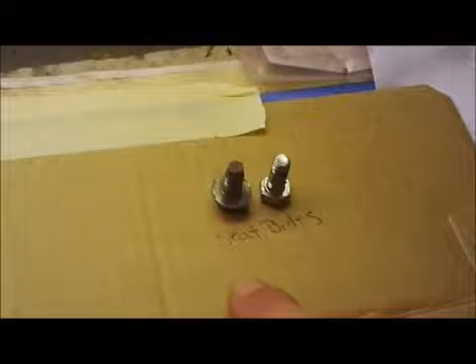Here's a tip of the trade. Whenever possible, when you're working on something that you've never worked on before and you're unfamiliar with its parts, bolt lengths, where things go, whatnot, I like to lay out a complete workbench with something, this time I chose cardboard, where I can label stuff. Just set the bolts here like that, parts, whatever, and right next to it, seat bolts. And then set everything up really nice, neat, and organized, and then you know where everything goes when you go back together.

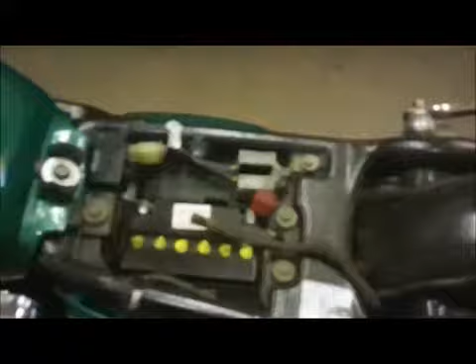But here, I want to show you guys, if someone's ever doing this, I noticed there aren't very many videos on YouTube of people doing the heads on this type of bike, 650 Custom. There's a bolt on each side of the seat, here and here, yep, right there, and you take those two bolts out, and the seat slides right up out and comes off, and unveils your battery and your regulators and whatnot, and more importantly, it reveals the tank bolt. So I'm going to zip out that tank bolt and I'll show you guys that.

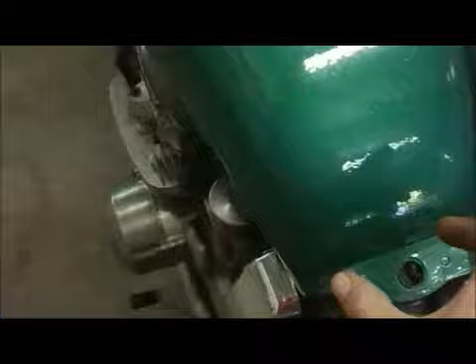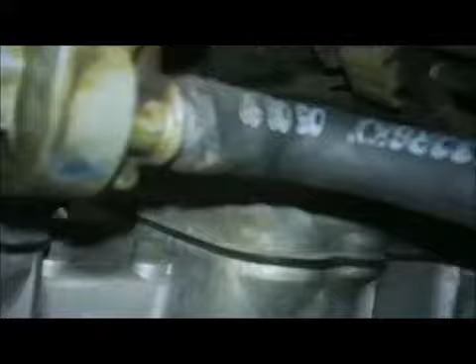Okay, so to remove this tank, you want to remove the tank bolt, and then the tank just slides in. It has two rubber grommets. It slides in on the frame, and then that one bolt is what holds it on. But you want to remove that tank bolt so the tank can move. And then you guys can't see, let me give you some light. You want to remove the fuel line coming off of your cock valve, and then you can remove the tank.

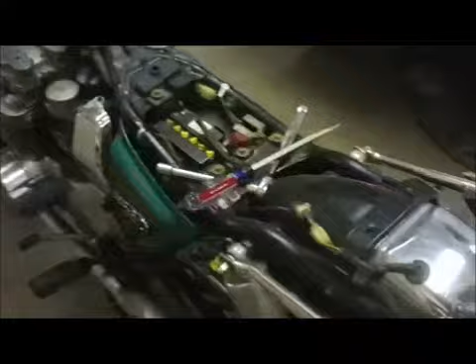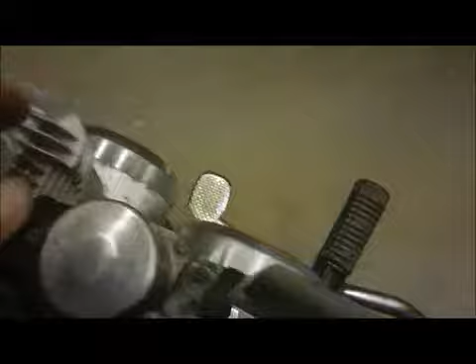Okay guys, I got the tank off, I got the seat off. I removed my fuel line completely from where it goes into the carburetor right here. I just took it off, get it out of my way. Next thing I'm going to be doing is I'm going to take off these airbox side covers to open up and give me some room. This one and this one, they're held on with Phillips.

Hopefully they come out. And then whoever did the carbs, where it goes from the airbox to the carbs, they just put heavy duty zip ties on it to hold it on. So I'm going to remove these zip ties here, try to push the airbox out of my way. These little rubber collars that hold in the carburetor to the airbox can actually be pushed in. They're rubber, as you can see here. See that? So you can actually push them into the airbox and give you a little bit more space to wrestle with this carburetor.

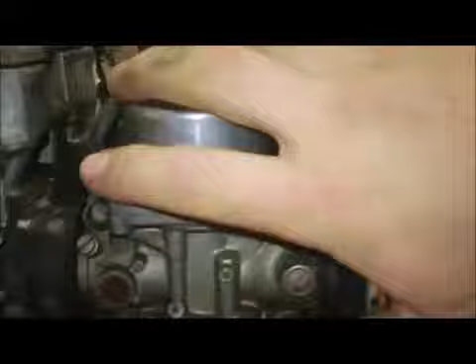Then I'm going to loosen these clamps and all these boots that hold in the four carbs, and I'm going to rock it up and down and try to pull it back as far as I can out of my way. I may remove these cables, these throttle cables and choke cable, and pull the carbs completely off of the bike to give myself ample room to work on the cylinder head. But if I can push these carbs back far enough to fuck with it, I might just leave the carbs where they are to save a little bit of time, but I haven't decided yet. But let me get started removing these and those and seeing what we can do here.

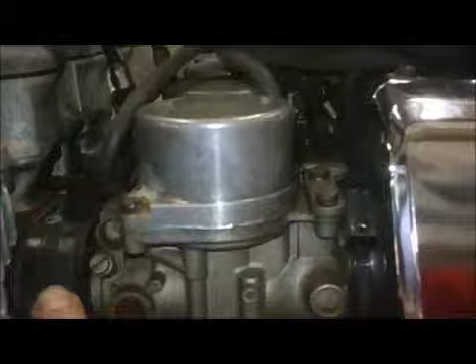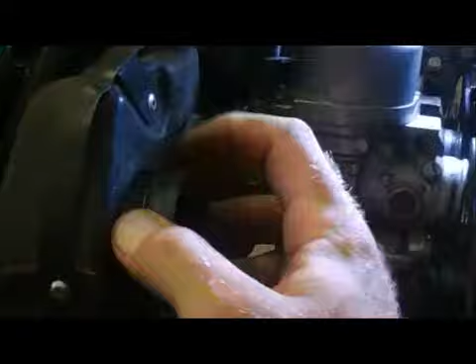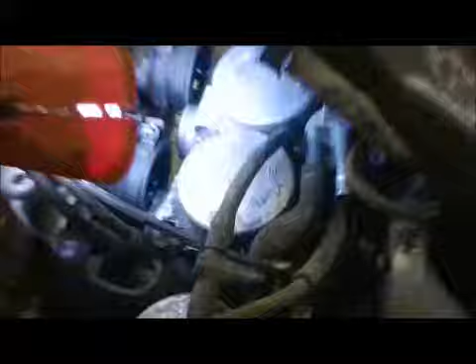Okay guys, these little intake boots here, they do just kind of slide right back in. You gotta pull that lip down and push them in. That gives you a lot more room to get the carburetor out. Gives you about a ½ inch here. Loosen up all those clamps. You want to rotate the carbs downward and they pop right out. Then you're gonna have a hose here that goes to the airbox that you're gonna want to remove.

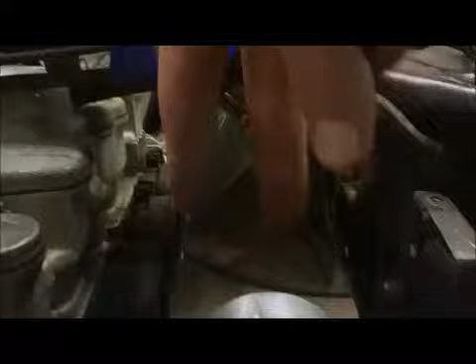Oh, my eye itches. And you're gonna have another little hose right there on top of the carb, this guy, that has to get removed, as well as these cables have to be removed, which I'm going to do right now. I'm going to yank the carbs out. Okay, so the carbs are out. I marked the one cable, this one, because there's two cables in the front. I marked which one was the rear cable so I can tell the difference, and then I'll automatically know which one was the choke cable.

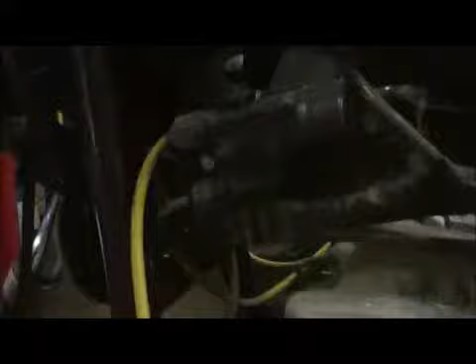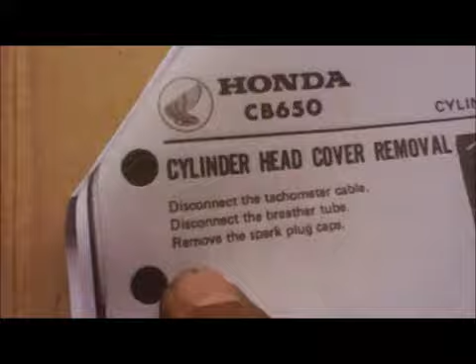That's not hard. I'm going to be removing my spark plug wires next, so I'm going to mark them. I don't know the exact firing order, but I'm just going to mark them 1, 2, 3, 4 straight across, and I will personally know exactly where they went. And then I have to remove this right here, which I believe is the tach. Yep, tachometer cable. And then I disconnect the breather tube and then remove the spark plug caps, and then remove the spark plugs, and then remove the covers.

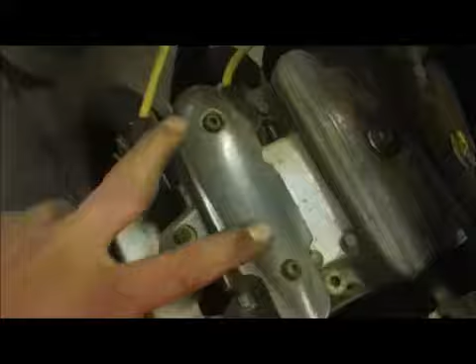So that means I'm going to be removing the tachometer cable, this breather hose, these spark plug boots, and then I'm going to be removing the spark plugs, and then I'm going to be taking out this cover, and this cover. Alright, so we got some Allen heads going on there, and we got some 10 millimeters going on there, and we'll zip that off and see what we got. Over here I got the carburetors.

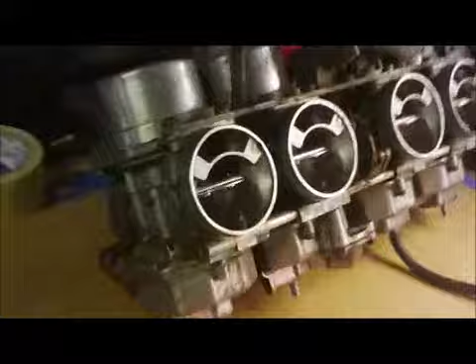They look pretty clean inside there, but that ain't shit because I can't see inside the float bowl. But like I said, this bike ran really fucking good, and I am not taking these carbs apart because I know they run good. I'll wait until the carbs start acting up and then I'll fuck with them.

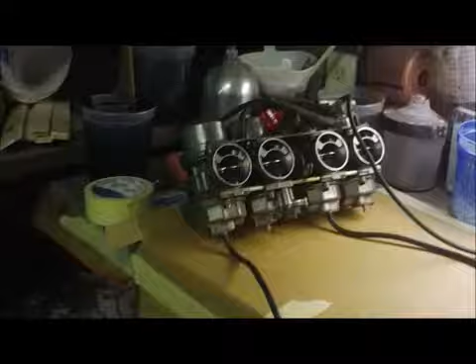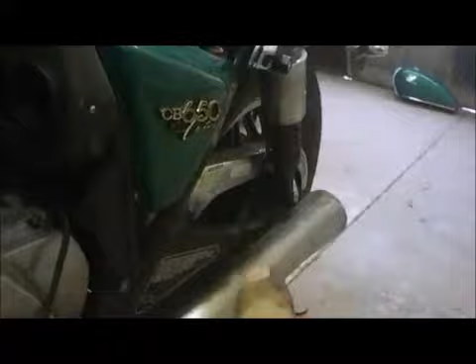Okay guys, I got all this crapola off. I got the covers off, tach cable, breather hose, spark wires. Didn't take the plugs out yet. The only thing I did that I didn't tell you guys was I dropped the exhaust. There's two 10 millimeters holding in each pipe, and then there's a 13 millimeter on each side that holds the back of the pipe on.

You just pull the collars off, and then you have collars here. Mine are actually pretty deteriorated. I should have anticipated that and bought new ones, but I didn't. So we're going to put it back together with these old ones, and then we're going to order some new ones on eBay because these are relatively cheap.

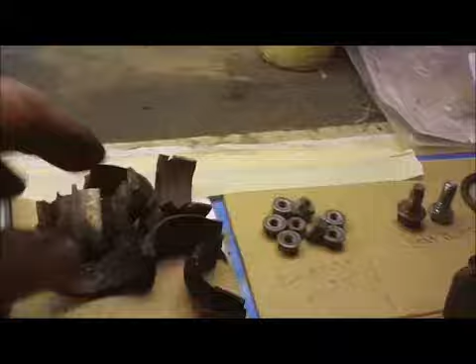And then you just pull the exhaust down. That side came off easy. This side has the kickstand here kind of holding it up. So I just left these pipes on because they're out of my way. Probably could have left the other side on too, but I took it off. I didn't realize that these black pieces just slide into the pipe.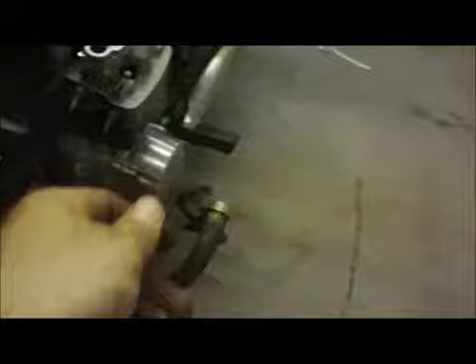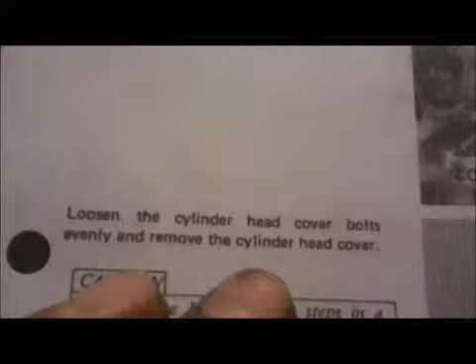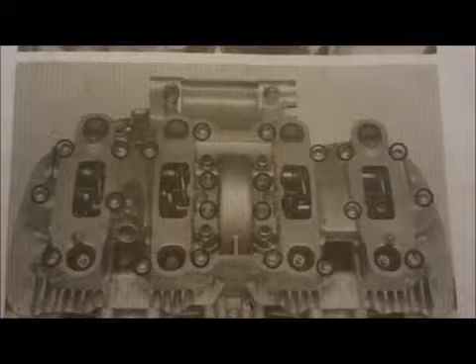So now, next, according to the directions here, we got: loosen the cylinder head cover bolts evenly and remove the cylinder head cover. Remove the bolts in 2 to 3 steps in a crisscross pattern to prevent warpage. And right there is a diagram of the bolts. All the ones that are circled are the ones that you're supposed to be removing. So let's get to it.

I think they are, let's see, they look to be 8 millimeter. Let's see, I got an 8 millimeter right here. Yes, 8 millimeter for the cylinder head cover bolts. Yes, sir. Okay, guys, got the cylinder head cover off. That's pretty straightforward and simple. It houses the rocker arms.

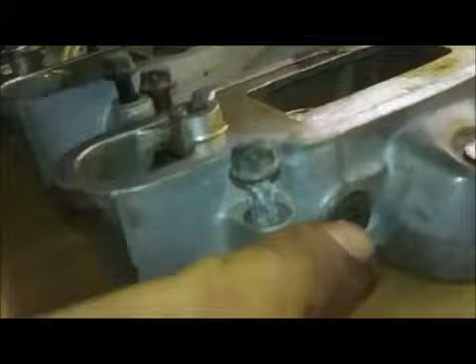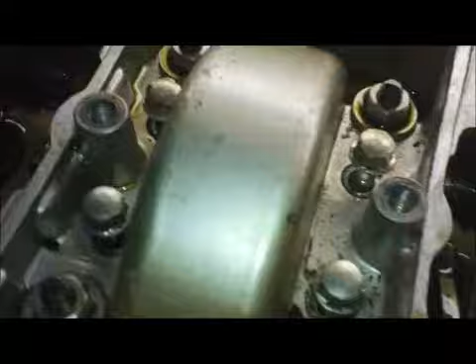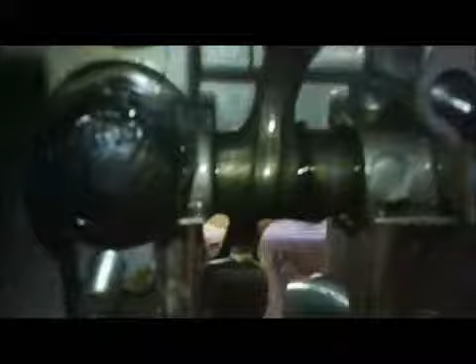You can take them all out. You take out these Allen heads there and there. And then the shaft that the rocker arm rides on slides out, and the spring and the rocker arm fall out and all that good stuff. But I'm not taking any of that stuff apart. I don't see any need to. This bike, like I said, ran really good. Everything looks good under here. There's really no need to take all that crap apart.

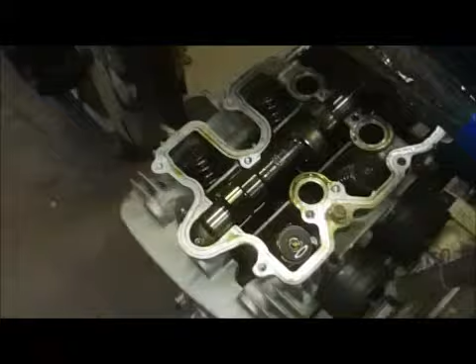Right here, I believe I'm going to be replacing those seals. Those 4 right there. Because they seal off these head bolts down inside of there, and I got all those seals in my kit, so I'm going to be popping them in there. But there's the cylinder head and the cam, and there's the cam gear.

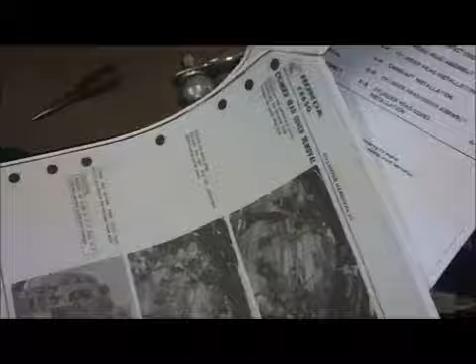Oh yes. Now we look in our instruction manual. Let me go to the next step. This goes into the cylinder head cover disassembly. We're not going to be doing any of that good stuff. This is what we're looking for here. Let me see. Go to the next one.

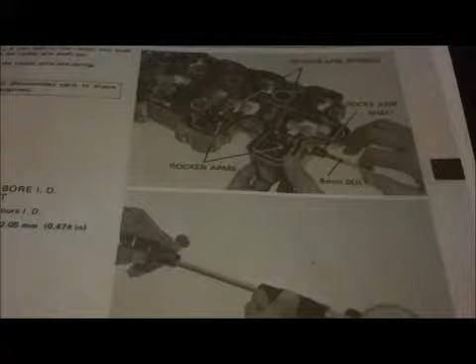Yeah, see, they even give you specs in here for rocker arm bore inner diameter measurement, rocker arm shaft outer diameter measurement, and all that stuff. They want you to use snap gauges and micrometers to measure that. I'm not here to make this thing back to 100% factory specs, blah blah blah. I'm not rebuilding the cocksucker. It ran great. So move on forward. We don't got to get that technical.

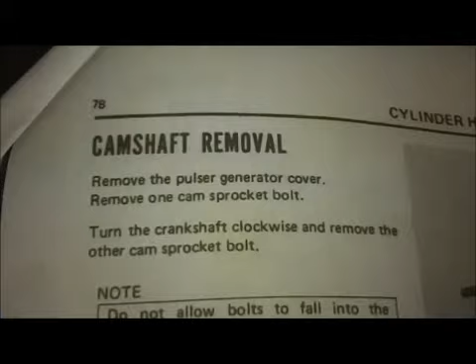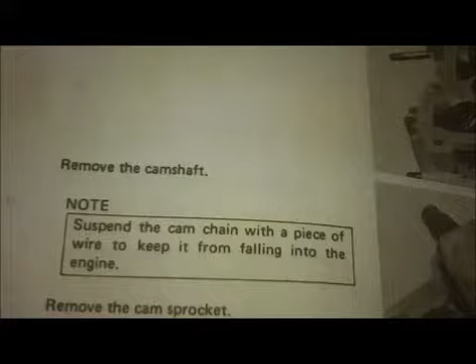We got camshaft removal. Remove the pulser generator cover and remove one cam sprocket bolt. Turn the crankshaft clockwise and remove the other cam sprocket bolt. Do not allow bolts to fall into the crankcase. No shit. Remove the camshaft. Suspend the cam chain with a piece of wire to keep it from falling into the engine. Remove the cam sprocket. And then cam bearing surface inspection. Duh. But anyway, so let's get this camshaft out of this fucking head, eh?

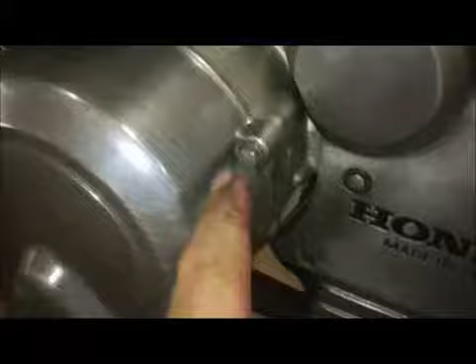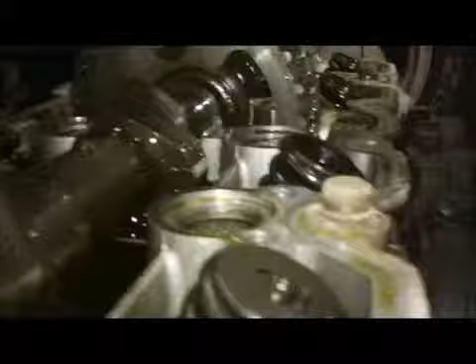So what we're going to be doing is removing the pulser generator cover, which is this cover right here. We got some more 8mm. Looks like we got 1, 2, 3, 4 of them. We're going to be removing that, so I'm sure we can access a nut to turn the crankshaft. And we're going to be removing that bolt right there. And then we're going to turn this 180 degrees, and we're going to take out the second bolt. And then this cam should come out.

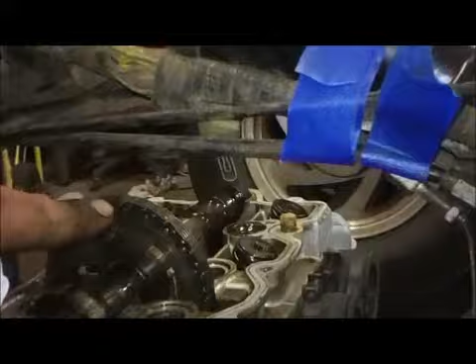This gear will be able to wobble around. You can work the chain off of the gear, and then I'm going to wire or bungee strap this chain up to the frame for right now, because you don't want that to fall back in, because I guess it's a cocksucker to put back on. Yada yada blah blah. So let's get that the fuck out of here.

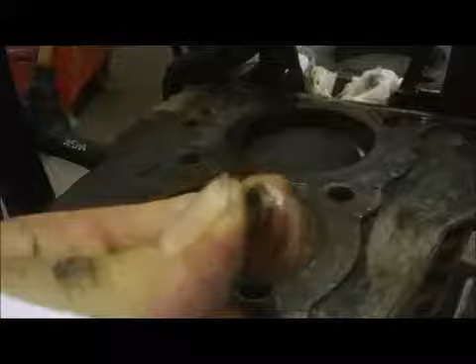Okay guys, I got the cylinder head removed now and all that good stuff. Right here's the oil galleys I was telling you about. There's one right there, and there's one right there. You can kind of tell by looking at it, the O-rings are just smashed. If the camera would focus. But they're kind of just smashed. They're not nice O-rings anymore. Both sides. I like that.

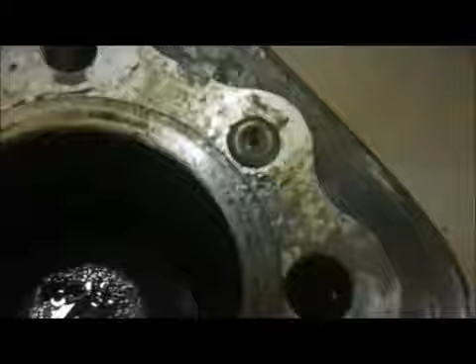It's just a mushed flat O-ring. So we'll be replacing them. I took out, somebody tried fucking with this before. Where did I put them?

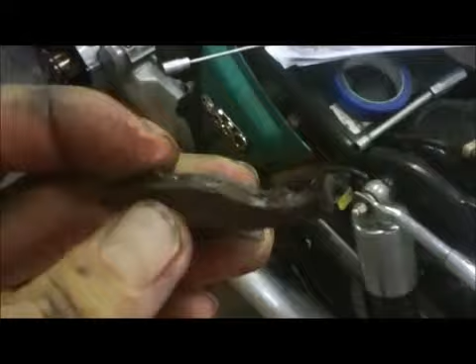Somebody was messing with it before, and they tried smashing, this looks like JB Weld. They tried smashing JB Weld up in there. I yanked some RTV, you can see this blue stuff here. Somebody was trying to mush some stuff in between the cooling fins of the cylinder head. But yeah, we got it apart now guys.

I'm gonna go in, I'm gonna get me some lunch. And get this thing back together.

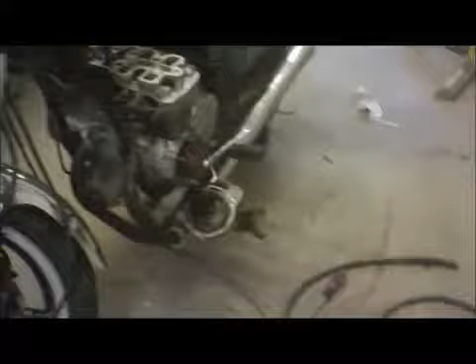Okay guys, I got the cylinder head back on and torqued down with the new gasket and the 2 O-rings. I didn't videotape me cleaning the gasket surfaces and whatnot. If you're willing to take on a job like this, it's a little bit of common sense that you want your gasket surfaces clean. So I didn't really go into great detail on cleaning gasket surfaces. I wanted to get it done, you know what I mean? So make sure your gasket surfaces are nice and shiny and fucking clean.

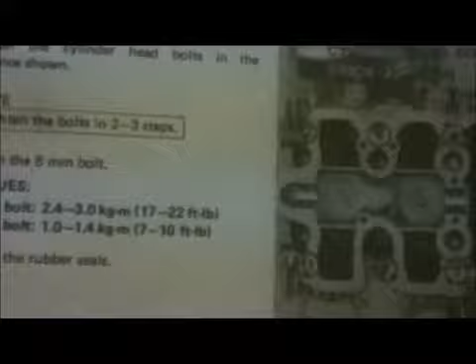Don't use any Dremel tools or fucking angle grinders or anything like that, because you're just gonna fuck up the gasket surface. Only use a razor blade, only use a Scotch-Brite, only use a rag with some brake clean on the son of a bitch. As per factory recommendations, 17 to 22 foot-pounds, and you're supposed to do it in like 2 to 3 steps. So I did it once at 17 and once at 22.

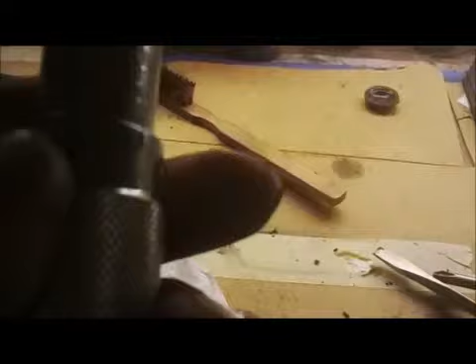I'm going to wait a little bit here, and then I'll go over and make sure all the torques are still good. I'm just using a clicker style torque wrench, nothing fancy schmancy. This one's a 3/8 inch, inch pounds instead of foot pounds, because some of the torque specs on this bike are too low for a regular old clicker style fucking wrench. This one's a Harbor Freight beauty, but it gets the job done.

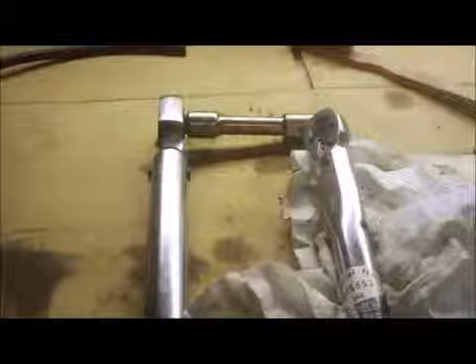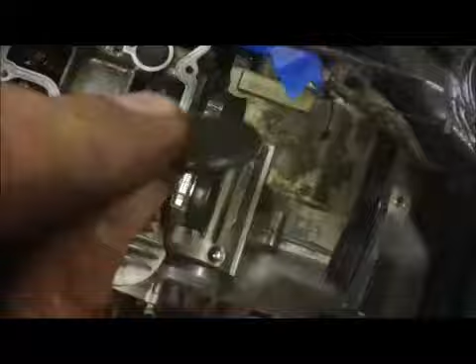So I got the cylinder head back on and snugged down with the new gasket sandwiched in there. Some air. I don't even know if you guys could see it. Whoop, right there somewhere. There's the new gasket. Oh yeah. So yeah, let's move on. After you make sure everything's torqued down, ready to go, you want to install these rubber seals that go over the head bolts. They seal out air from coming in, so make sure those are on.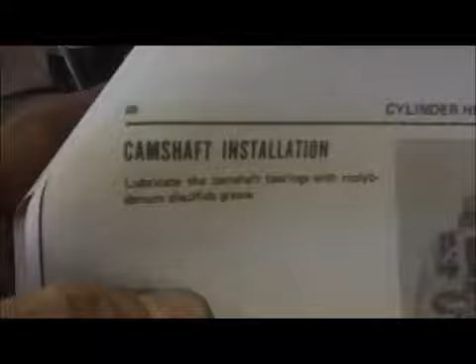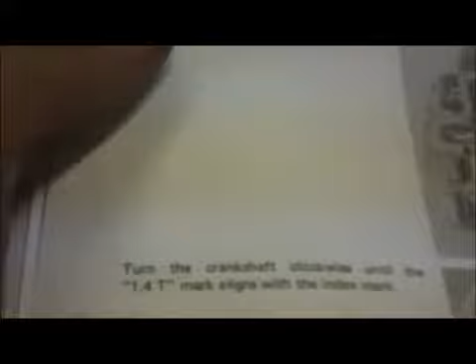And we'll flip the page here in our tech sheet. Lubricate the camshaft bearings with molybdenum disulfide grease. We're going to use assembly lube. And then we got to go through all this bullshit. Turn the crankshaft clockwise until the 1.4 T mark aligns with the index mark. There's a picture of that right there. And then place the chain over the cam sprocket and install the camshaft. There's that there.

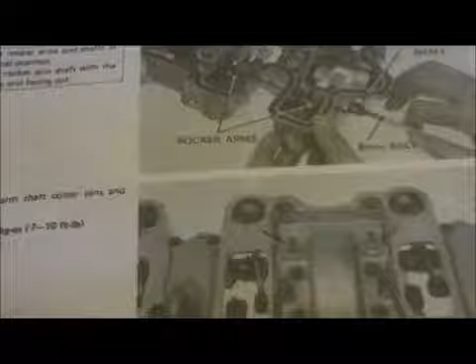And then align the center of the index mark on the camshaft right end with the cylinder head surface. Align the camshaft sprocket bolts with the camshaft holes. Install the sprocket bolts and tighten to the specified torque, 10 to 13 foot-pounds. Right there's the index mark. Oh yeah, let's get her done.

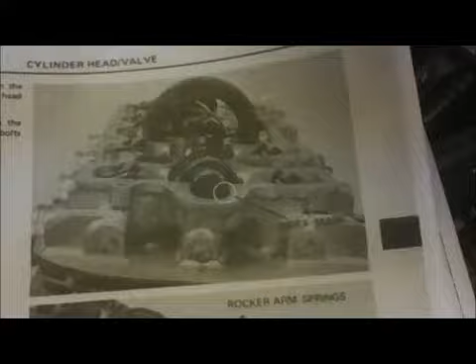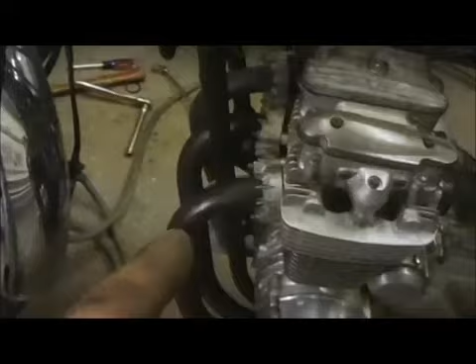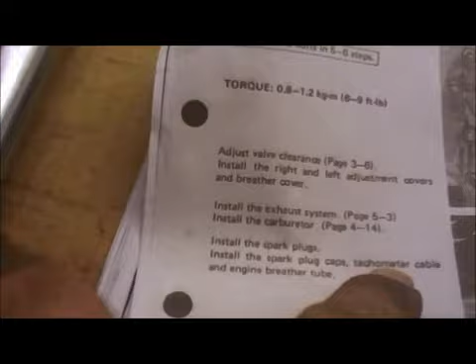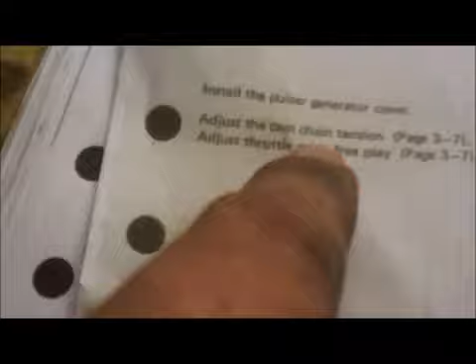Okay guys, so I got the cylinder head cover installed. I got the rocker covers installed. I got the exhaust installed. That was kind of a pain in the dick, but it's on there. All mounted up. Next, we got to install spark plugs, spark plug wires, tachometer cable, the breather tube, and the carburetors, and the pulse generator cover, and the chain tensioner.

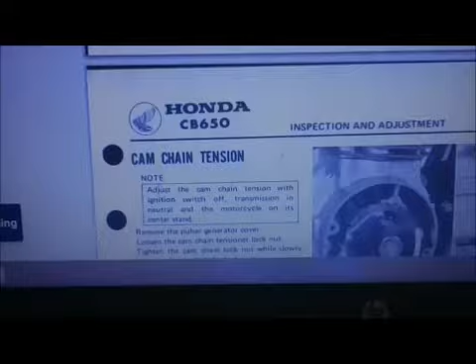Now, I have to set the cam tensioner first. I got that pulled up here on my laptop. Right there, cam chain tension, and that goes through the steps there. I gotta do that, and then we'll have it back together, and maybe I'll be able to show you guys here. Fire it up!

Okay guys, so I had that bike all together, and actually I took it for a ride. Took it for about a 20-mile ride. I forgot to bring out the camera for the first start. I was just so anxious, you know what I mean? But look, no leaky. It's all nice and clean now.

No more leak. It was leaking right there. No more leak. No more oil down there. No more oil up my pant leg. No more oil all down the cover or nothing. Hell yeah, she run good. But no more oil leak. Fire her up.

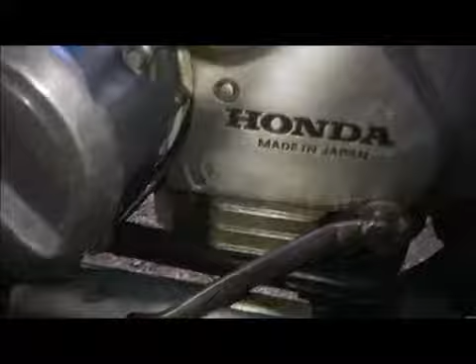Oh. So I like that kind. We got that all wrapped up and done.

Now I just gotta clean the shit out of the goddamn garage, cause it is a mess. I got tools on the floor. It's not that bad. I guess it could be worse. But I gotta pick up this mess here of junk.

And oh yeah. No more oil leak. I like that kind.